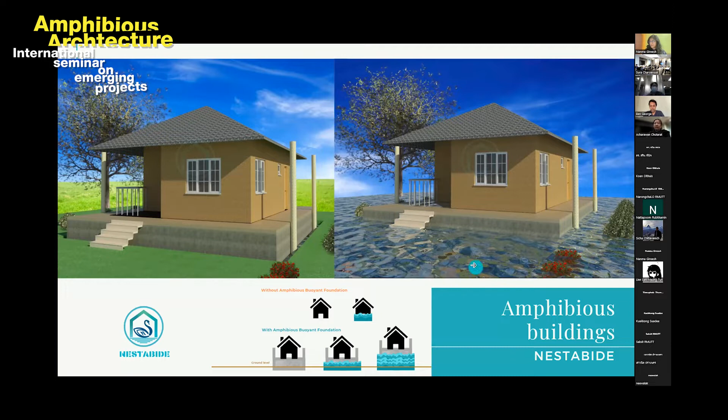If we consider the near future, say 2050, it is estimated that the likelihood of extreme precipitation could potentially be around 3 to 4 times in different parts of Asia. To be a particular instance, we are from India, and we are mainly focusing on Kerala. So we would like to bring up Kerala as a case study here, and what we have done over the past years.

Kerala is usually considered a mostly safe place, and people believe they are not worried about climate change. But things started to change from the year 2018.

We had a devastating flood that affected many livelihoods and caused loss of many human lives. Even before 2018, we were into this amphibious architecture, and we tried to convince and spread the technology of amphibious housing, stating we need to be prepared for the future. But we were not welcomed very much, as people believed that Kerala is always safe.

Later on, after the flood in 2018, the situation started to change. People started to think they need to go for some alternatives. But even after 2018, the situation was not much changed because of the perception that this technology doesn't exist. So after 2018, our real struggle started again, to convince the authorities and the people.

We conducted many discussions with practitioners and government authorities, and finally we were able to showcase what amphibious architecture is possible in the local context of Kerala, India. Thus we made our first prototype called Amphi-Nest.

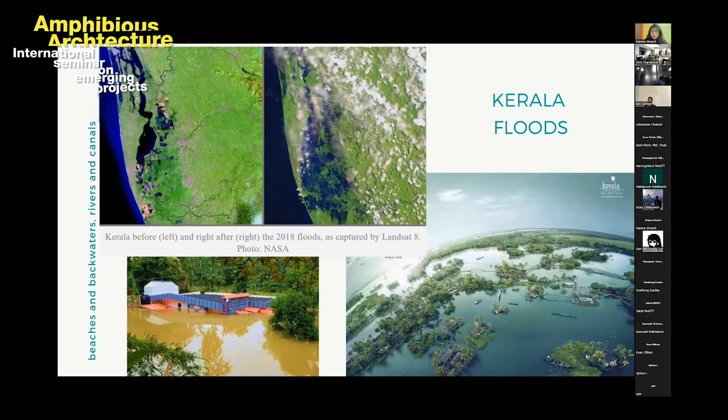It happened again in 2019, again in 2020, twice in 2021, and twice already this year. So we are also expecting floods in September and October. Currently it is also raining now, I'm in Kerala right now. The condition is worsening, so people are now thinking about adaptation. I guess we should all have that kind of awareness without needing an eye-opening situation, but yes.

This is NestAbide, an interdisciplinary firm. I am a civil engineer, Ben is an electrical engineer, but we are putting our heads together to find solutions, in the architecture department at IHE Delft also. So we are kind of interdisciplinary, and we have an interdisciplinary team with us as well.

We are currently focusing on water conservation, flood resilient and resistant eco technologies, as well as amphibious and floating buildings. We mainly concentrate on amphibious buildings. So considering pre-flood, during-flood and post-flood conditions, we are working with different technologies for all three of these conditions.

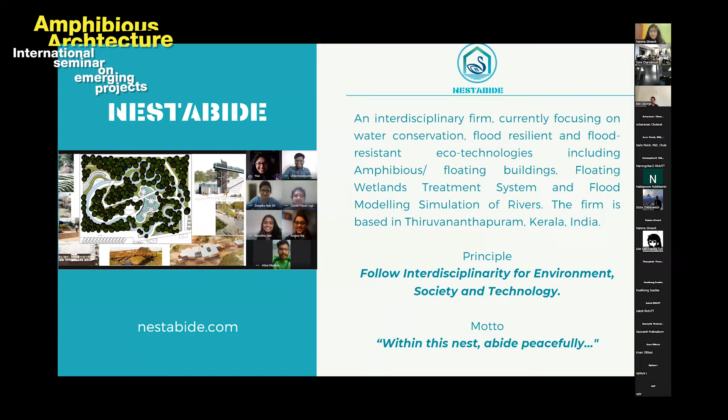This was the highlight of how we try to explain this to the people of Kerala. They don't want to live on water all the time, so we thought of introducing amphibious houses first, so that people don't have to adjust to the variations of living on land versus living with water. They don't have to change their usual lifestyle at all.

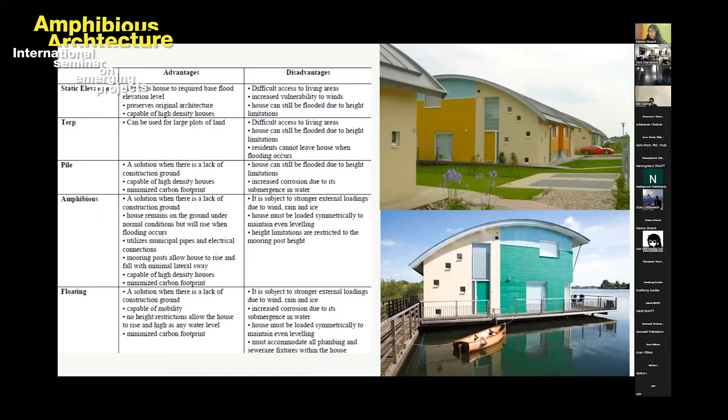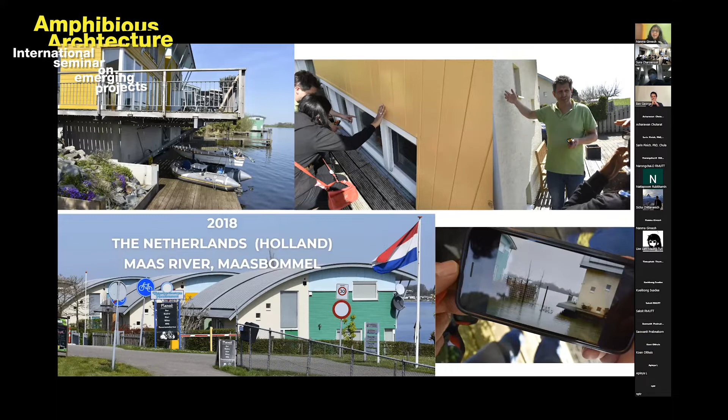In 2018, we visited the Maasbommel amphibious houses in the Netherlands. Jan Leder is an owner of an amphibious house. We recently visited him and he explained all the details. He was thrilled to have such an amphibious house for him and his family, I guess. This is where our perspective started to change.

This is the amphibious house in Maasbommel, which was on the ground, and in 2011 it was afloat. Last year also it was afloat, but we didn't get the pictures yet.

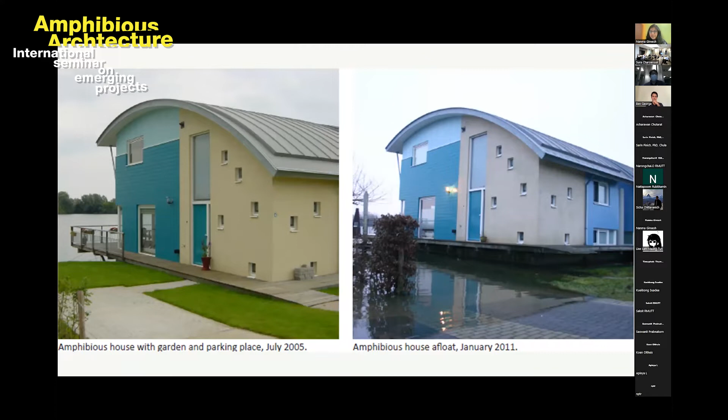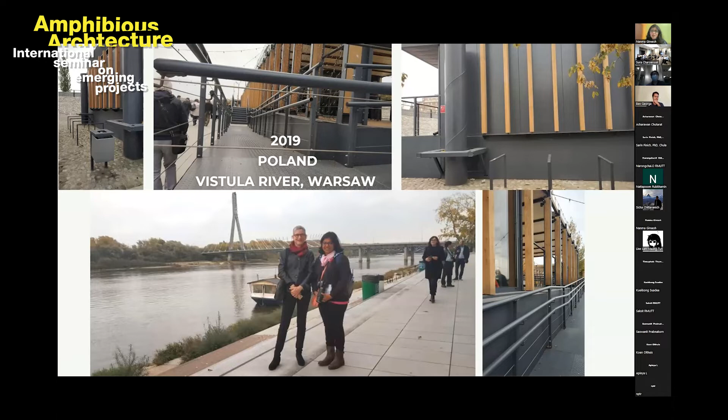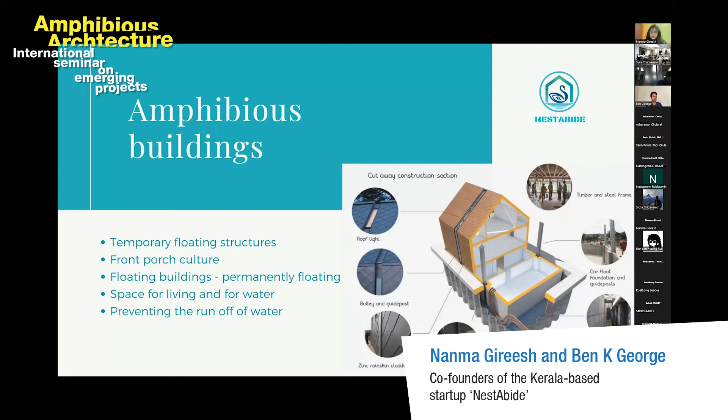The advantage is that the front porch culture can be saved for an amphibious building and also a floating building. Floating buildings are permanently floating, this is temporary floating, and this is space for living and for water. So this is what we like a lot: space for living and space for water. We don't have to fight against nature. We can live with nature, I guess.

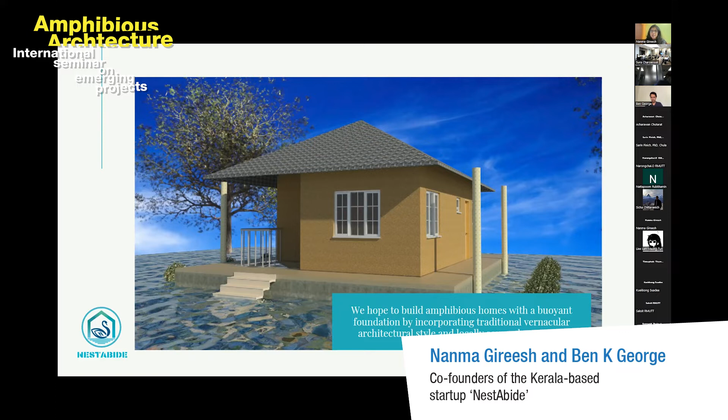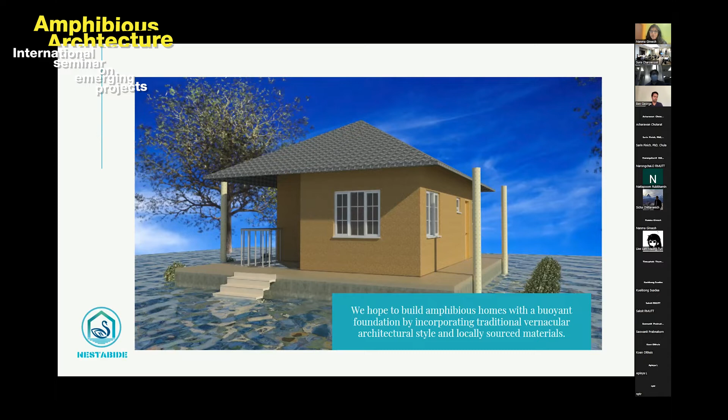So we hope to build amphibious houses with a buoyant foundation by incorporating traditional vernacular architecture style and locally sourced materials. That's what we are doing in Kerala right now. So the slope roofs, the veranda or the attic all around the house, the traditional lightweight wooden structures, panels - all these traditional vernacular style and materials, we are trying to bring back and combine with the amphibious buoyant foundation so that people can live on it like it's their own home.

So this is a concept, amphibious tourism, to promote amphibious houses so that people can live in these amphibious houses and analyze the occupancy, comfort, and everything.

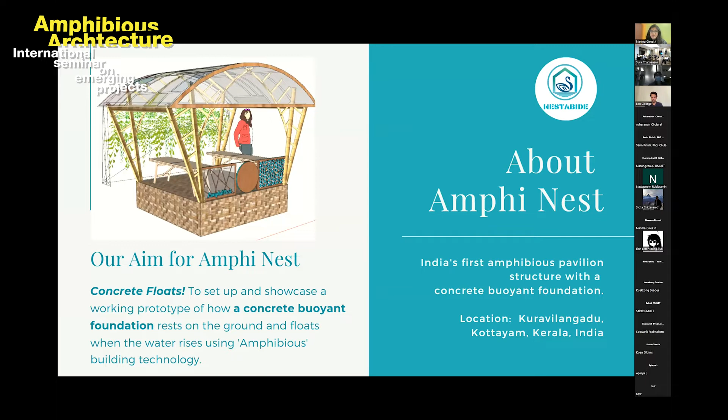So yes, this is AmphiNest. AmphiNest is a working prototype of a pavilion structure. It is a buoyant foundation made of concrete, and yes, it's a bird's nest inspired amphibious pavilion. It is a pilot project of NestAbide. AmphiNest is India's first working prototype of amphibious building technology with a concrete buoyant foundation.

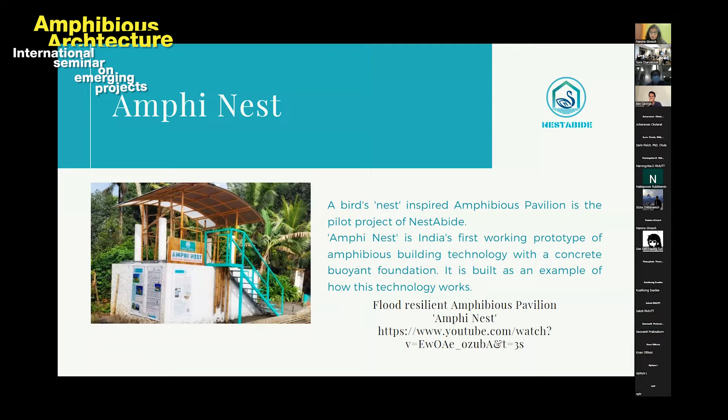Until then, people didn't know that concrete floats. So we had to prove that concrete floats, and now we are building different amphibious houses because of AmphiNest.

This took around only 35 days and 3.5 lakhs INR, which means about 4,024 euros, for a 200 square feet amphibious building, including a wet dock. You can see the wet dock here. It was created so that we can input water and simulate the flooding conditions and show people when it floats and when it stays on the ground and everything.

So we made it a working prototype. If anyone comes over, we'll put water inside and show how it works, how it floats, and they can stand on it, sit on it, push it, pull it, no matter what.

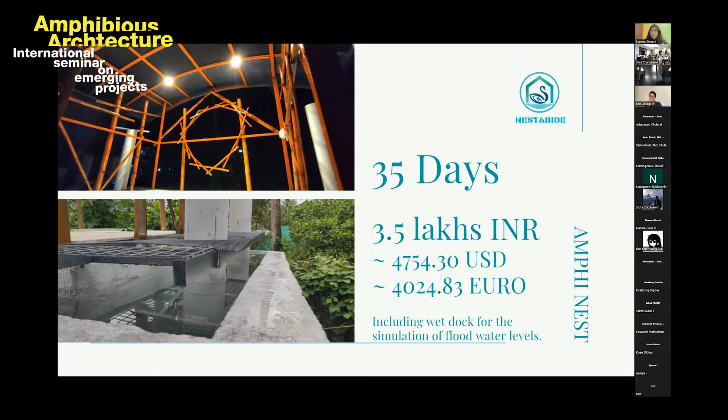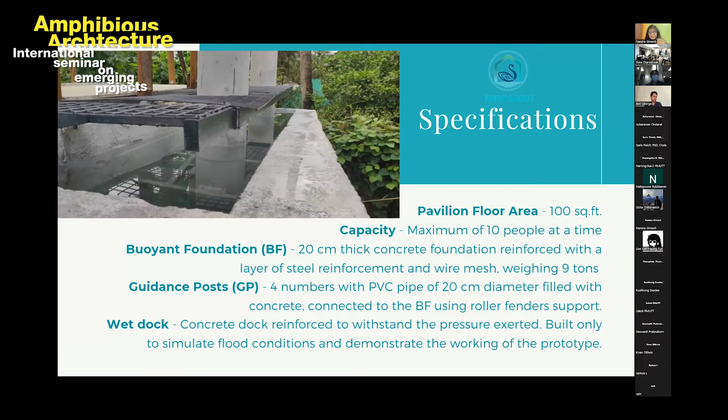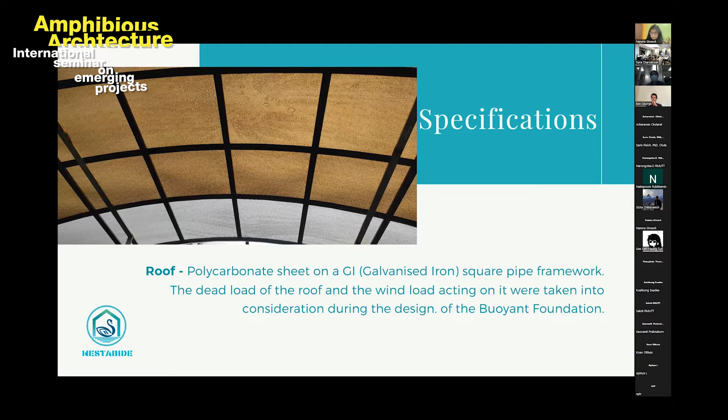So this is a night picture of AmphiNest. I'm rushing through to show you a video about AmphiNest. The roof is just a polycarbonate sheet on a GI square pipe framework, so that you just have to stand there and understand how the concrete works and how concrete floats.

It was inaugurated by Shri P. Prasad, who was the minister for agriculture in the government of Kerala. This called for more attention from people. He was the chairman in 2018, during the floods, of the housing board. They had discussed all the possible alternatives for the usual houses built in Kerala right now. They had never heard about amphibious houses. So he was really intrigued by the idea, and that was the only reason he agreed to inaugurate the structure, so that he could also dedicate it to the society.

So he inaugurated the structure and said this beautiful, but very alarming, word: 'We are not living in a safe zone. The changes in monsoon pattern and characteristics indicate effects of climate change.' People started to believe that, okay, we are not living in a safe zone, after hearing from him.

So yes, we'll show you how this is our AmphiNest and how we...

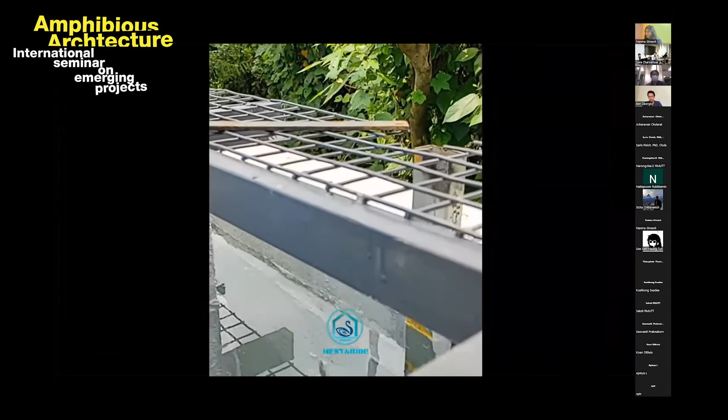So that's the video of AmphiNest, how it was constructed.

After the inauguration of AmphiNest, we received projects with the government of Kerala, with support of Kerala Development and Innovation Strategy Council (K-DISC). They are helping us construct amphibious homes for low-income people affected by floods from the regions of Munro Islands and Kuttanad in Kerala, which are both flood affected regions.

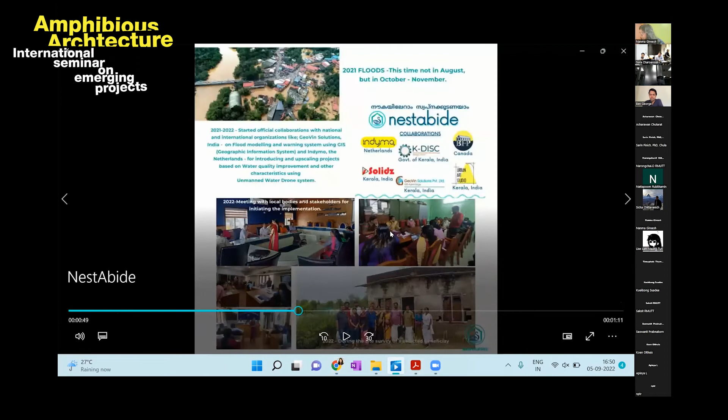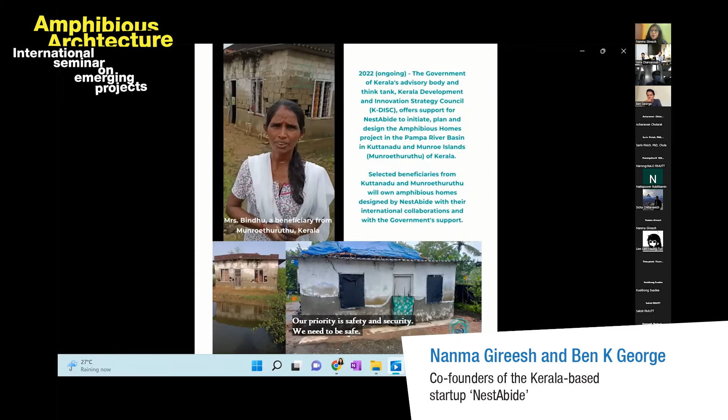This is Mrs. Bindhu, a beneficiary identified from Munroethuruthu. This is her house, and she moved from the place about two years ago. The Kerala government is supporting the ongoing project and funding the construction of amphibious houses for Mrs. Bindhu, and also one more person identified from Kuttanad.

His place is in another district in Kerala, which is affected during floods only during the monsoon season. Munroethuruthu and Kuttanad are mostly affected during floods almost all throughout the year. But Hari's place is really entirely different.

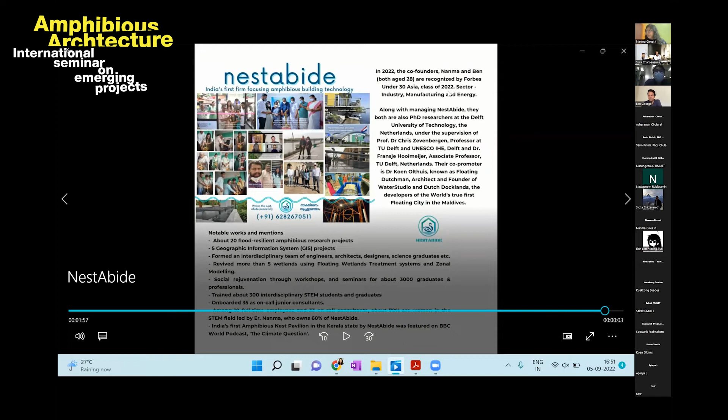So yes, coming back to the presentation. We've been focusing on constructing these three houses in Kerala especially right now. And the best part is that these three different areas are really different, but also similar to each other.

Two of them are near rivers and lakes - two rivers and one large lake system in Munro Islands and Kuttanad. The third case is near a riverside, and the river is flooded during monsoon, mostly because of landslides. That's another problem we are facing in Kerala.

So we are identifying all kinds of materials and solutions for how we can innovate the existing amphibious structures and existing conditions, or even materials, so that we can improve the structure for these beneficiaries in Kerala.

So this is basically NestAbide. These are the place in Munro Island that we have identified. We'll have to deconstruct or demolish this existing structure to build a new amphibious house in Munro.

This is funded by the government of Kerala, and if successful, they'll help us build more houses in Kerala, one identified for one person every year at least, because there's this project called Life Mission, where they identify one person from one panchayat and fund the construction of houses for them per year.

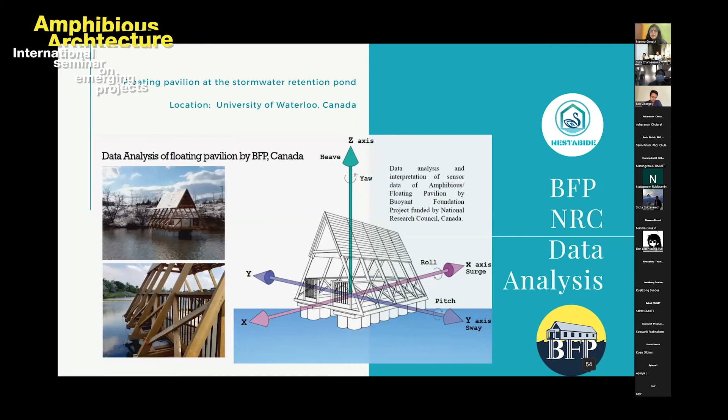So that's the calculation there. Government is supporting us. This is a project we did with Dr. Elizabeth C. English, and these are some of our other publications and other projects.

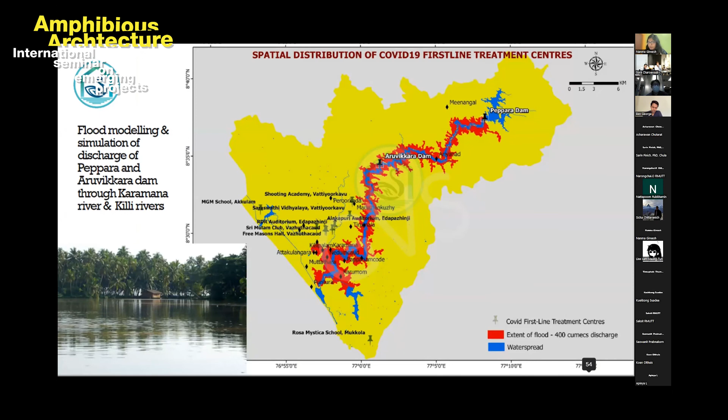This is a flood modeling and simulation of a river in Trivandrum. We also do floating wetlands treatment systems.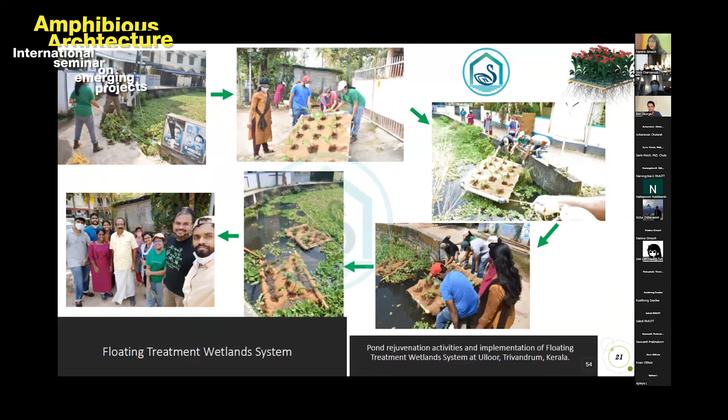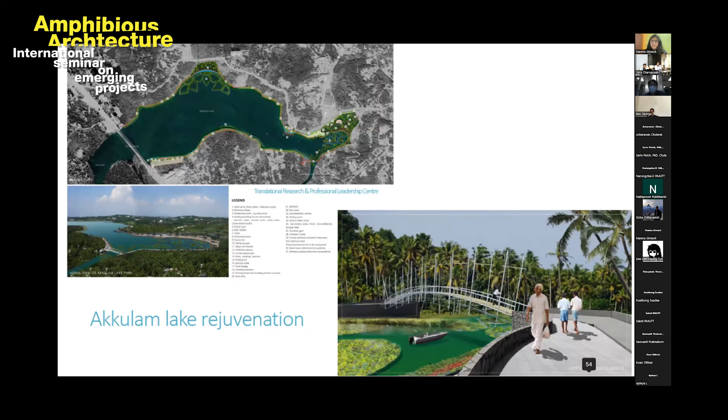These are a few examples of floating treatment wetlands systems in Kerala that we did. We were also part of multi-million projects of the government of Kerala, like Padmatirtha Kulam, and Akkulam Lake Rejuvenation, to rejuvenate existing lakes and rivers through nature-based solutions, as well as techniques like amphibious and floating buildings, so that we try to build with nature rather than against it.

So yes, that's us. We are also hoping to write a book - that was a recent idea. We are hoping to write this book as a kind of inventory of all the amphibious and floating buildings from around the world.